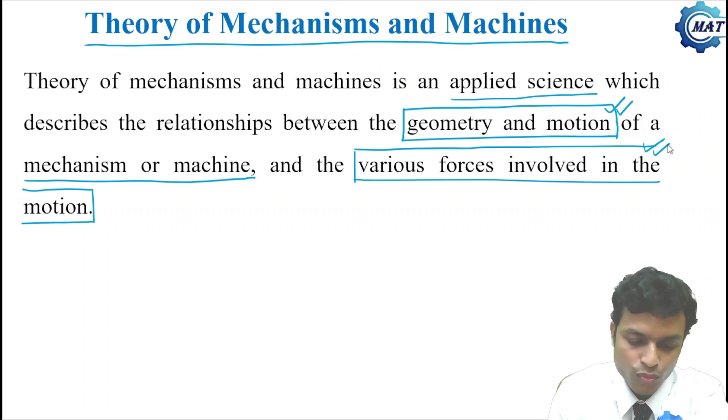So basically, the subject defines the motion of a mechanism or machine in two aspects. First, it describes the motion as a function of geometry only, and in the second stage, it describes the various forces involved in the motion. So based on this, the subject can be divided into two groups: number one, kinematics,

and number two is kinetics. In kinematics, the motion of a machine or mechanism is a function of geometry only, and we do not consider the forces. That doesn't mean forces are absent — without force, motion is impossible. But here we do not consider the forces, as forces are hidden in the first stage, that is kinematics.

In the second stage, that is kinetics, we consider the forces, and this subject defines the various forces involved in the motion. So this subject is broadly divided into two groups, kinematics and kinetics.

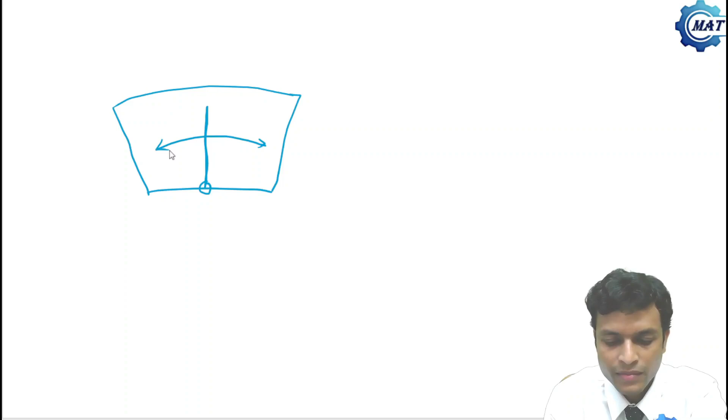Let me explain this with the help of an example. Let us consider a windshield wiper mechanism of an automobile — this is the windshield and this is the wiper blade. To design the wiper mechanism, the designer first has to confirm that this blade can cover the desired area or not, and that depends purely on the geometry of the mechanism.

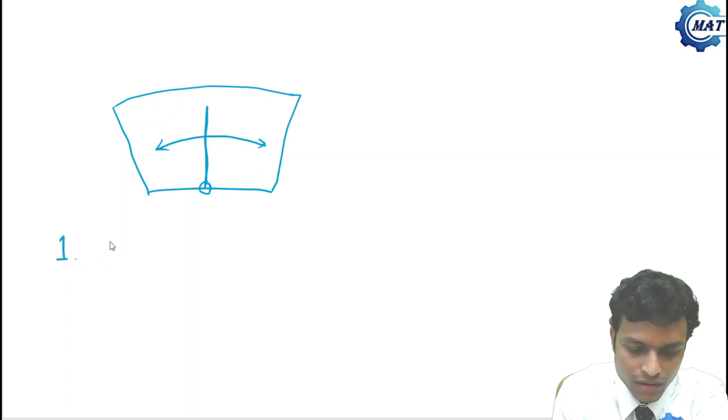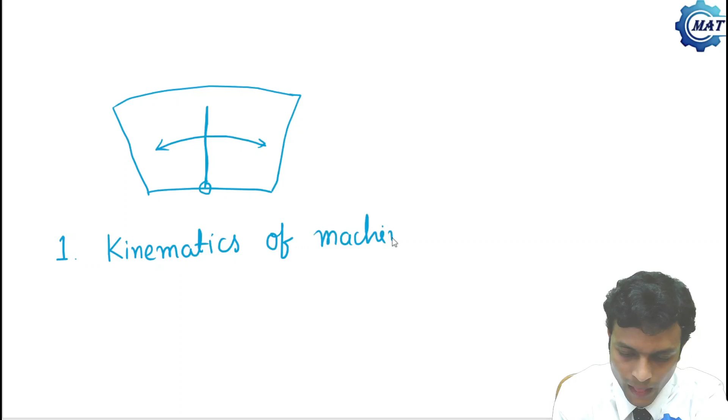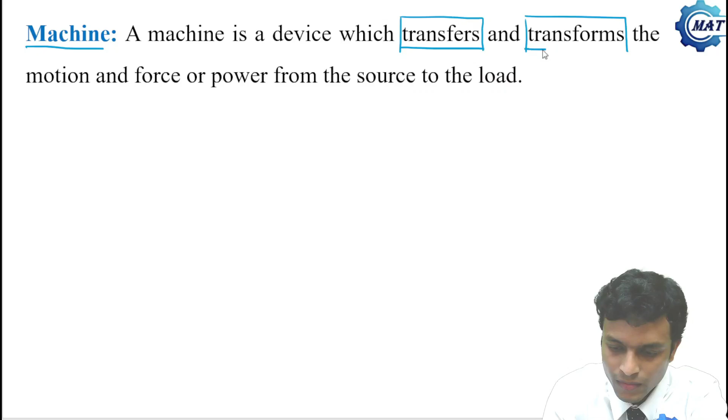Now let us see the definition of a machine. A machine is a device which transfers and transforms the motion and force or power from the source, that is the input, to the load, that is the output.

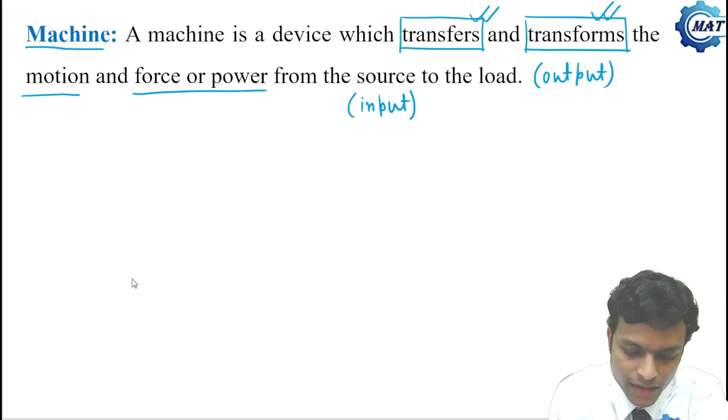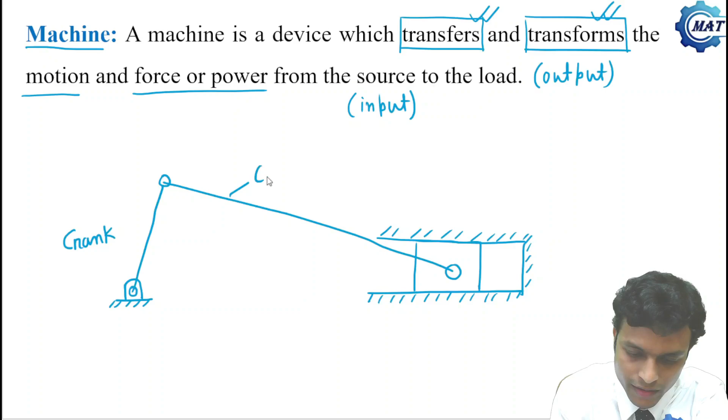Let me explain this with an example. This is an IC engine, where this is the crank, this is the connecting rod, this is the piston, and this is the cylinder. As input, or source, gas force is available at the piston.

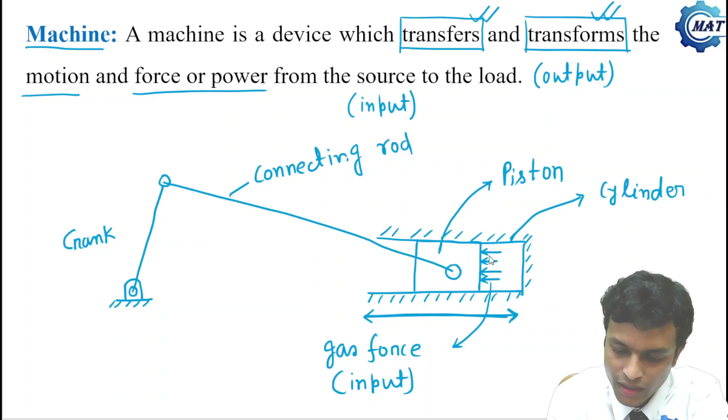And the motion of the piston is to-and-fro rectilinear oscillation. This motion is transferred to the crank by this IC engine, which is a machine. So this machine transfers the input motion available at the piston to the crank, which is the output, and the motion of the crank is continuous rotation. So this engine transfers the motion from the piston, the input, to the crank, the output. Not only that, it also transforms the motion from to-and-fro rectilinear oscillation to continuous rotation.

So a machine does two things: it transfers and transforms the motion and force or power from the source, the input — gas force here — to the load, the output. A load is present at the crank for the IC engine. We also have to note that input is available to us, whereas output is desirable to us. So the continuous rotation is what is desired.

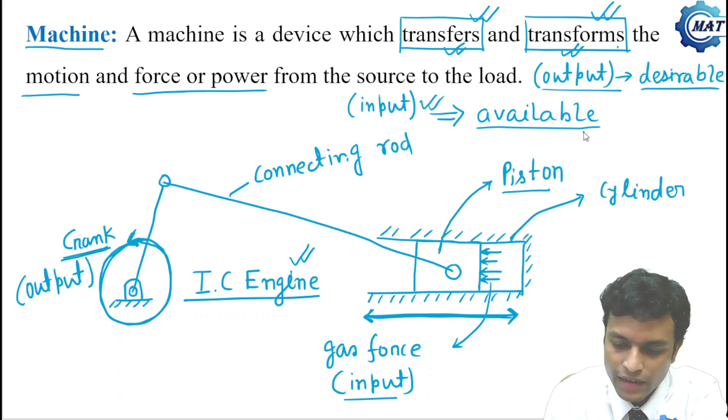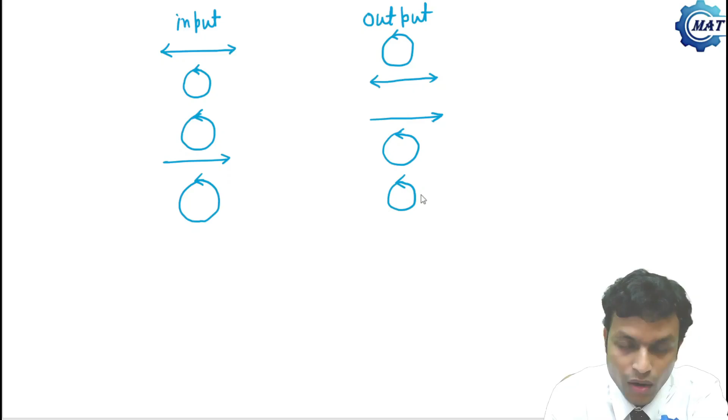Now we have seen that input in the IC engine is to-and-fro rectilinear oscillation, whereas output is continuous rotation. There are various combinations between input and output. The vice versa is also possible — input continuous rotation, output to-and-fro rectilinear oscillation. Input continuous rotation, output unidirectional rectilinear motion, and the vice versa of this is also possible, from unidirectional rectilinear motion to continuous rotation. Also continuous rotation at different speeds — input continuous rotation, output also continuous rotation, but at different speeds.

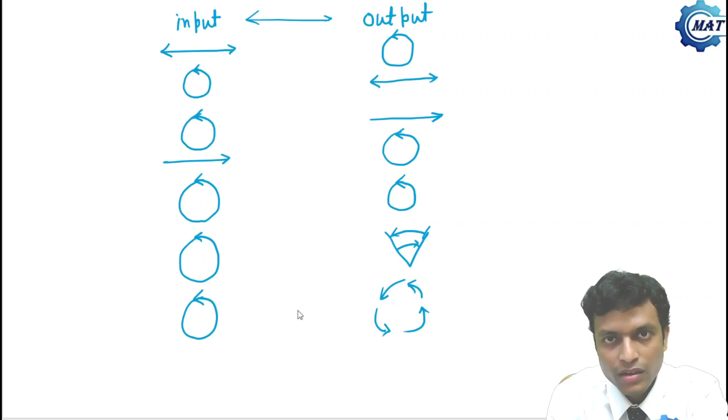From continuous rotation to angular oscillation, and vice versa of this is also possible, from continuous rotation to intermittent rotation. So these are various combinations between input and output motion — this is the transformation of motion. A machine transfers and transforms the motion and force or power from the input to the output, and these are examples of various combinations between input and output motion.

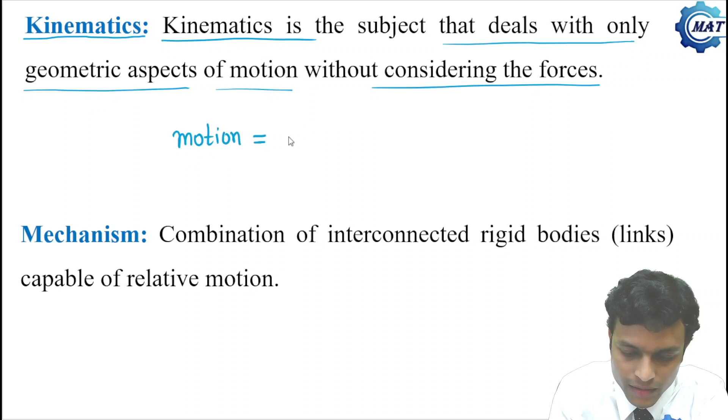Now let us see what kinematics is. Kinematics is the subject that deals with only the geometric aspect of motion without considering the forces. So in kinematics, forces are not considered — the motion is defined as a function of geometry only.

And in kinematics, a machine is referred to as a mechanism. In the study of kinematics, a machine is called a mechanism. So when we study kinematics, we call a machine a mechanism.

Now let me give you the technical definition of mechanism. Mechanism is a combination of interconnected rigid bodies, which are technically called links, capable of relative motion. So this is the combination of interconnected rigid bodies. This term has importance in mechanism.

We know that a machine is called a mechanism when we study kinematics, and kinematics means the geometric aspect of motion. So these links must be rigid in kinematics. Why? Because forces are present. When a machine is in running condition, various forces are present there. That force will deform the links if they are not rigid. If they are not rigid, that force causes deformation of the links. Then the geometric value or geometric form of the links will be changed, or geometric values will be lost. So geometric analysis will no more be valid there. So links must be rigid when we study kinematics. Otherwise, geometric study will be invalid.

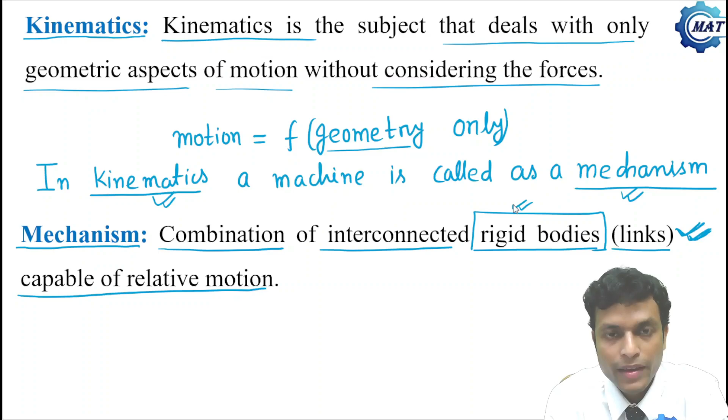Now let us come to one very important point, that is kinematic pair. We know that mechanisms are combinations of interconnected rigid bodies. The rigid bodies are called links. Now the interconnections between links of a mechanism are called kinematic pairs. So the interconnections are called kinematic pairs.

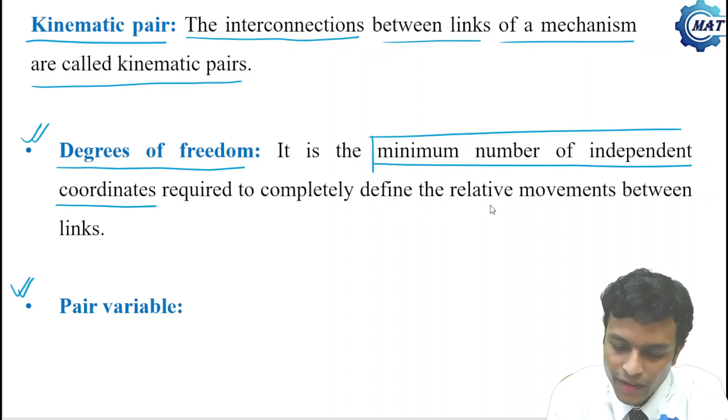Now before going to detailed study, please note two important terms: degrees of freedom and pair variables. Degrees of freedom is the minimum number of independent coordinates required to completely define the relative movements between links, called degrees of freedom of a kinematic pair. We know that a kinematic pair connects various links, and the minimum number of independent coordinates required to define the relative movement between links is called degrees of freedom of that kinematic pair.

And the independent coordinates are called pair variables. So pair variables are the independent coordinates. The independent coordinates are called pair variable.

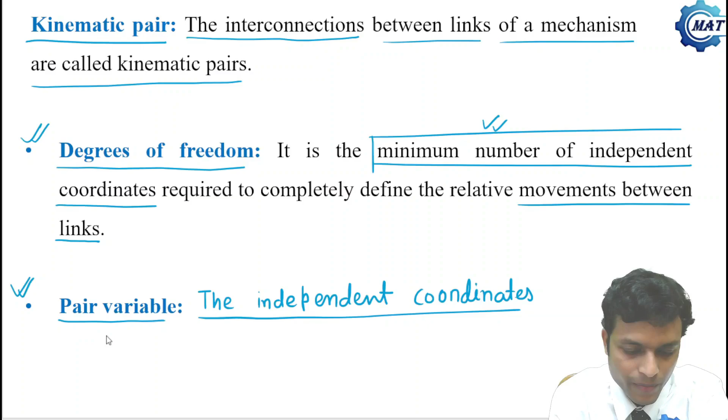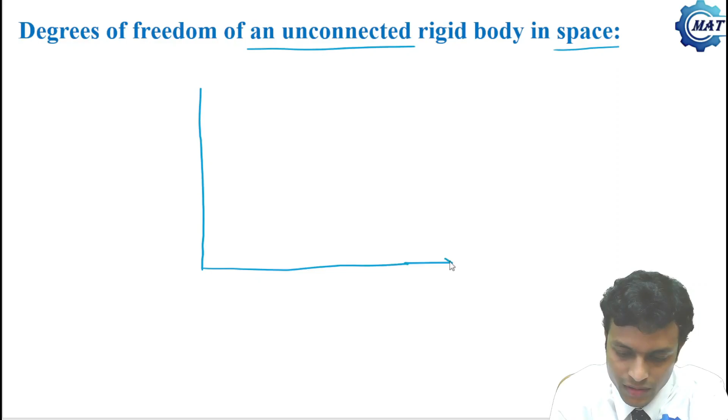Now let us see what is degrees of freedom of an unconnected rigid body in space. So let me draw one Cartesian coordinate system in space. This is a three-dimensional Cartesian coordinate system in space, with coordinates x, y and z.

An unconnected rigid body can translate along the x direction by an amount delta x. It can also translate along the y direction by an amount delta y. It can also translate along the z direction by an amount delta z. It can rotate about the x-axis by an amount delta alpha. It can rotate about the y-axis by an amount delta beta, and it can also rotate about the z-axis by an amount delta gamma.

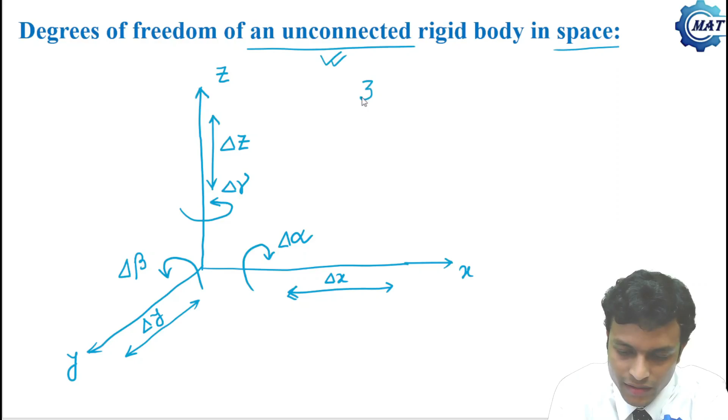So there are 6 motions available for an unconnected rigid body in space: 3 translations, which are delta x, delta y, delta z, and 3 rotations, which are delta alpha, delta beta, and delta gamma.

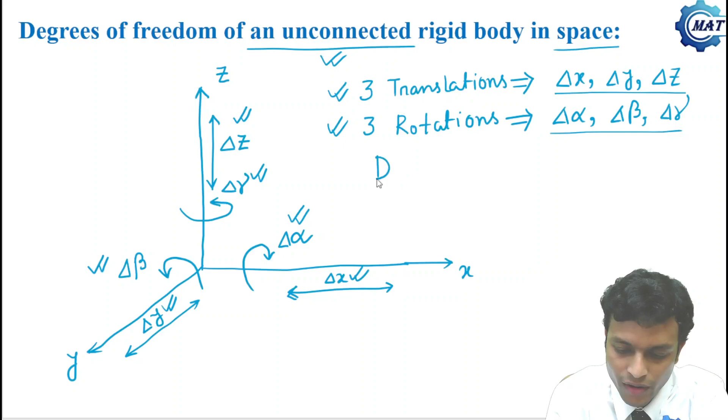Now these 6 independent coordinates, that is 3 translations and 3 rotations, all these 6 coordinates are independent of each other. Why are they independent? Because we can give any amount of delta x, any amount of delta y, any amount of delta z, and similarly any amount of delta alpha, delta beta, and delta gamma. So all these 6 coordinates are independent, as we can give any value to each coordinate. So 6 independent coordinates are required to completely specify the relative motion of an unconnected rigid body in space. So the degrees of freedom of an unconnected rigid body in space is 6.

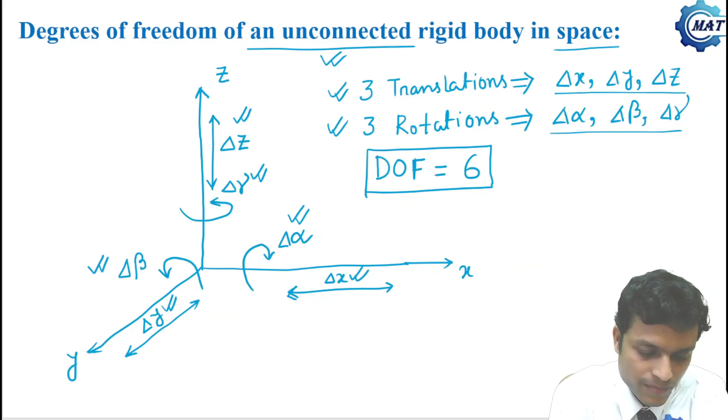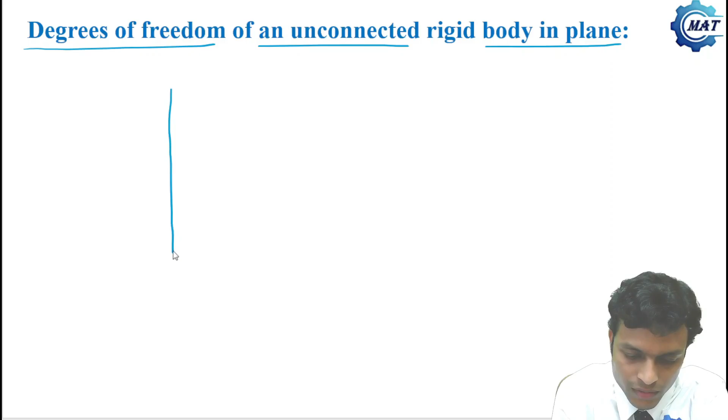Now let us see what is the degrees of freedom of an unconnected rigid body in plane motion. We have discussed for space, now for plane. So let us define that. Let us consider the xy plane, this is x, this is y.

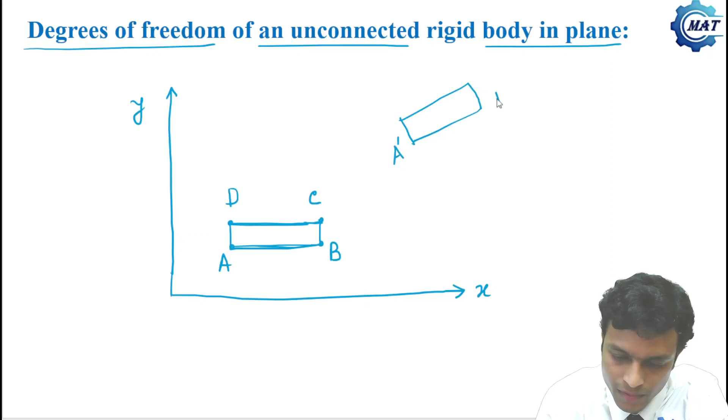And this is a rectangular rigid body, an unconnected or free rigid body, that is A, B, C, D. This is one instant where the orientation of ABCD is like that. And in the second instant, the orientation becomes like this: A prime, B prime, C prime, D prime.

Now let us first locate or define the position of B prime from B. That is, the x translation of point B is delta x and y translation of point B is delta y. So by these two independent coordinates, motion of point B can be completely defined. But that doesn't ensure the relative motion of the entire rigid body.

Why? Because we have located point B prime, but there may be a rotation of this face AB by an amount delta theta. So now if we define these three, that is delta x, delta y and delta theta, for any face AB, then the orientation of the entire rigid body has been completely defined. So three independent coordinates are required to completely specify the relative motion of the rigid body, and they are two translations, delta x and delta y, and one rotation, delta theta.

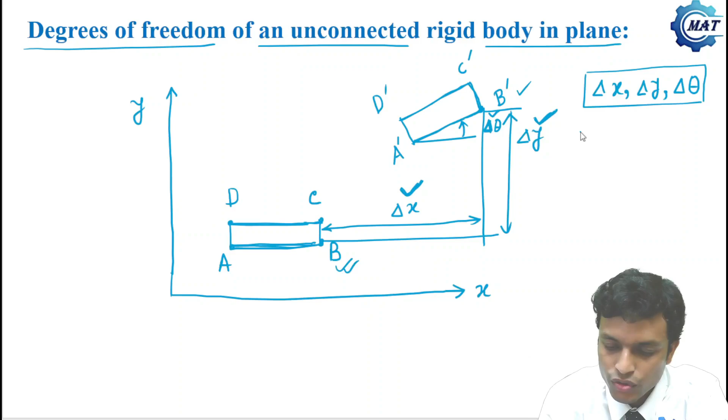And here we can give any amount of delta x, any amount of delta y and any amount of delta theta. So each of them are independent to each other. So degrees of freedom of an unconnected rigid body in plane motion is 3.

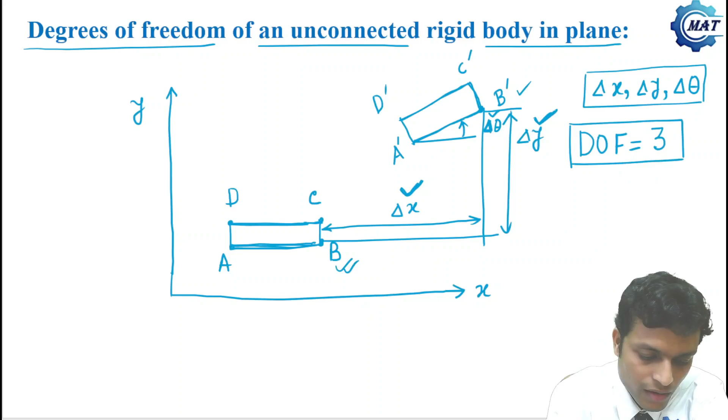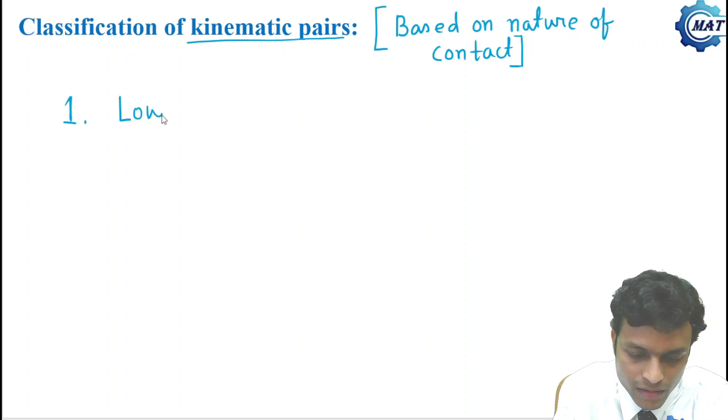Now let us classify the kinematic pairs, first based on nature of contact. Kinematic pairs connect different links, and based on the contact between links, we can classify kinematic pairs under three headings: number one, lower pair; number two, higher pair; and number three, wrapping pair.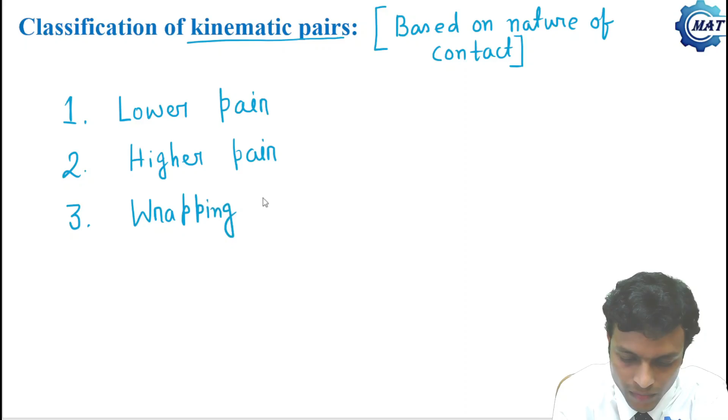In lower pair, the links are connected through their surface contact. In higher pair, links are connected through their line or point contact. In wrapping pair, one body is completely wrapped around another. So in lower pair, there is surface contact between links. In higher pair, contact is made through line or point contact. And in wrapping pair, one body is completely wrapped around another.

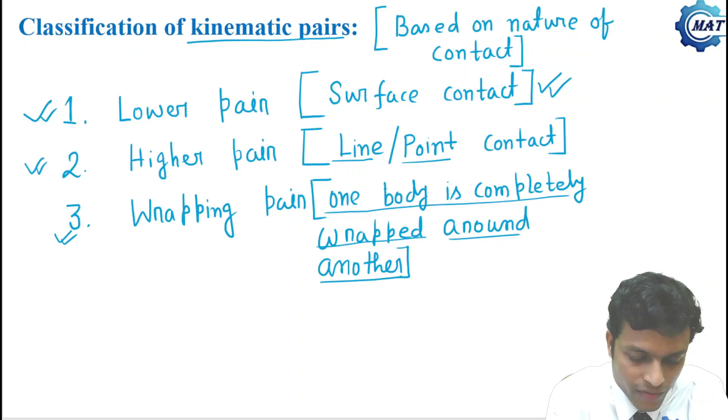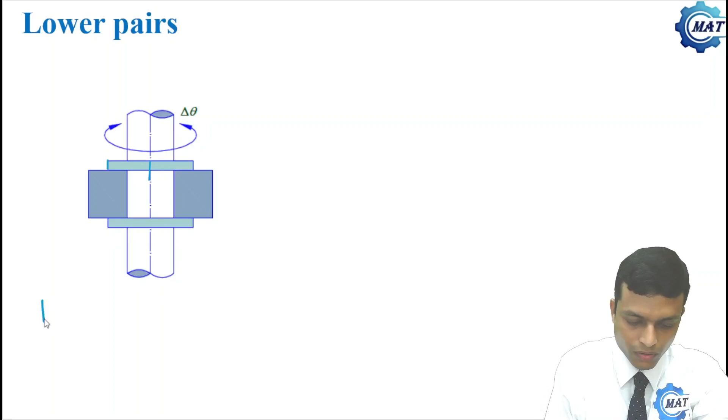Now let me explain the various kinds of lower pair first. This is the first kinematic lower pair, which is called revolute or turning pair. This is body 1 and this is body 2.

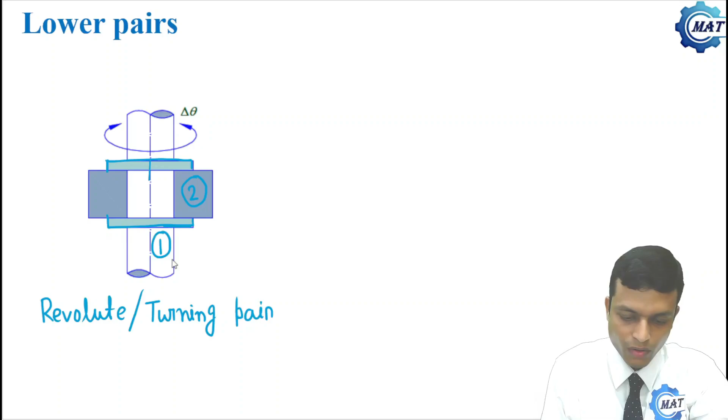Body 1 is a cylindrical rod and in body 2 a cylindrical hole of the same diameter as body 1 is made, and in addition two collars are made on body 1. These collars are an integrated part of body 1.

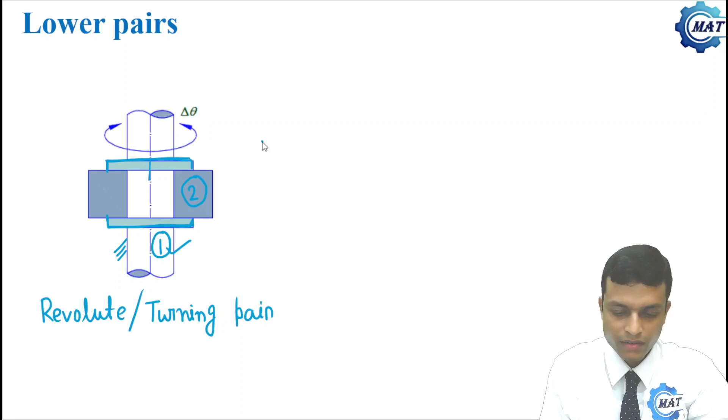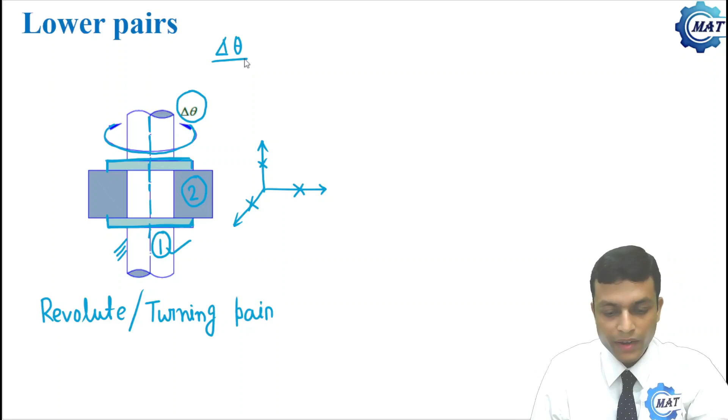Now if we fix body 1, then all translation motion of body 2 has been restricted. That is, body 2 cannot translate along x, cannot translate along y, and cannot translate along z. Three translatory motions of body 2 have been restricted. Body 2 can only rotate about the axis of body 1, and this rotation can be defined by delta theta.

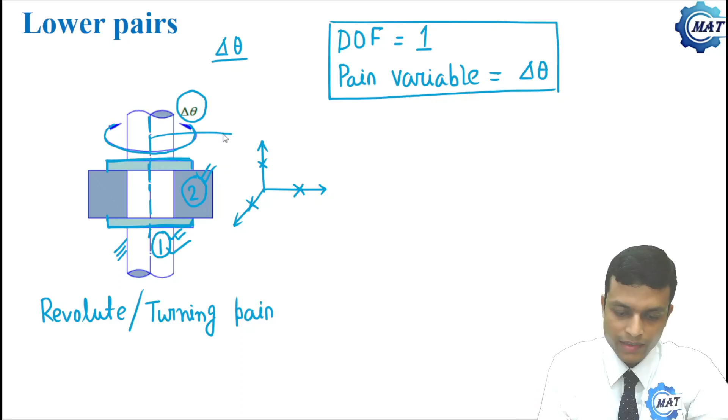So only one rotation can completely define the relative movement between body 1 and body 2. So degrees of freedom is 1 for the revolute or turning pair, and the pair variable is delta theta. This axis of body 1 is also called the axis of the revolute pair.

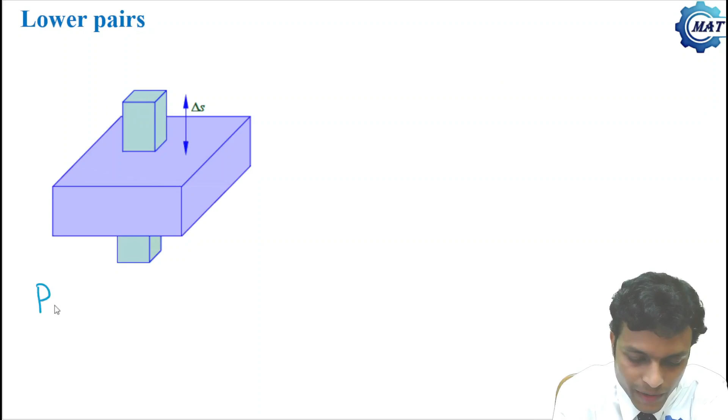The second kinematic lower pair is the prismatic pair. This is body 1 and this is body 2. Body 1 is a rectangular bar, and on body 2 the same size rectangular slot is made.

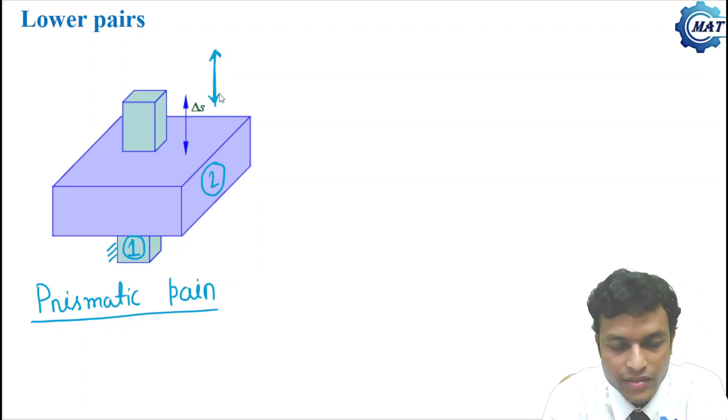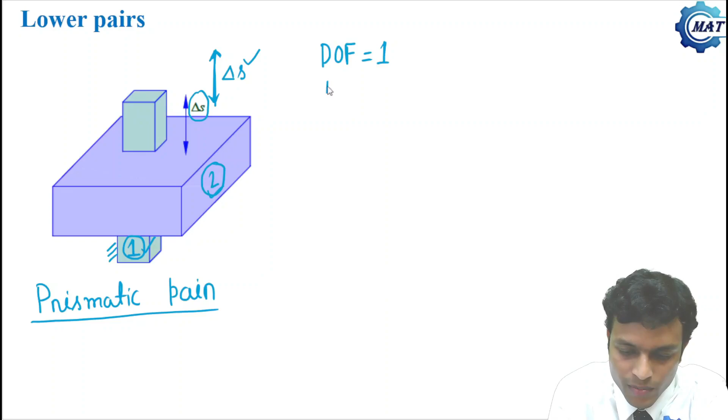In this combination, if we fix body 1, then body 2 can only translate along the slot. All other motion of body 2 has been restricted, and this motion can be defined by a single coordinate, delta s. So by this single independent coordinate, the motion between 1 and 2 can be described. So degrees of freedom of the prismatic pair is also 1, and the pair variable is delta s.

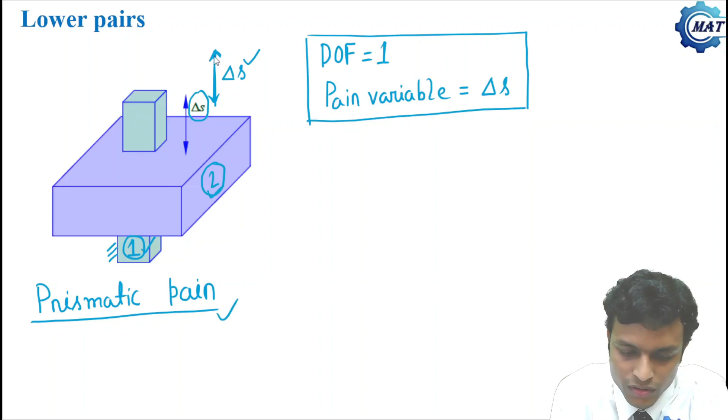So the prismatic pair only allows translation along the slot. This is a model of the prismatic kinematic pair. This is body 1 and this is body 2. On body 1 there is a rectangular slot, and body 2 is a rectangular bar only. Now if we hold body 1 fixed, body 2 can...

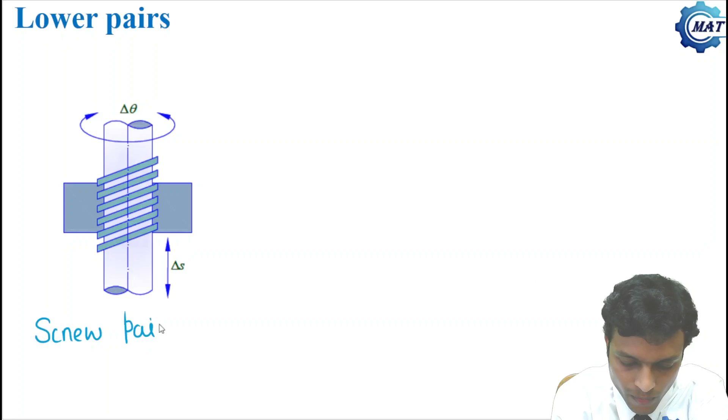The third kinematic lower pair is the screw pair, where body 1 is a screw and body 2 is nothing but a nut. Body 2 is the nut and body 1 is the screw, and on body 1 helical threads are made.

In a screw-nut pair, if we fix the screw, the nut can rotate as well as translate along this direction. So two motions are available for the nut: one translation delta s and one rotation by an amount delta theta. But these two coordinates, delta theta and delta s, are not independent to each other.

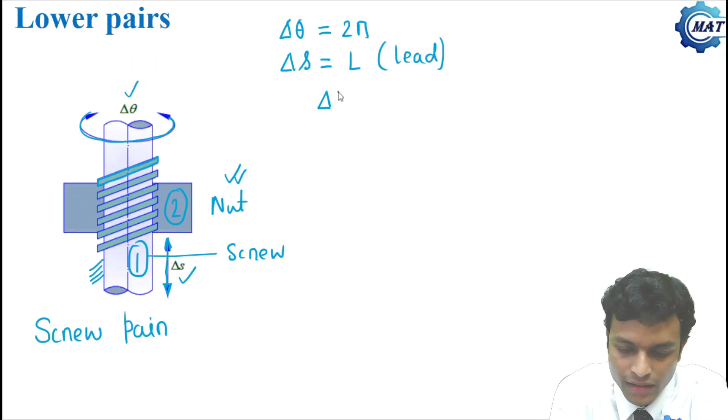Why? Because if we make delta theta equal to 2 pi, delta s will always be L, that is the lead of the screw. So we can develop a relationship between delta theta and delta s, that is delta theta by delta s equals 2 pi by L. So they are related to each other, they are not independent to each other.

We cannot give any amount of delta s and any amount of delta theta independently. For a particular value of delta theta, delta s will be fixed by this relationship. So only one independent coordinate, delta theta or delta s, can completely specify the motion between screw and nut. So degrees of freedom of a screw pair is 1, and the pair variable is delta theta or delta s.

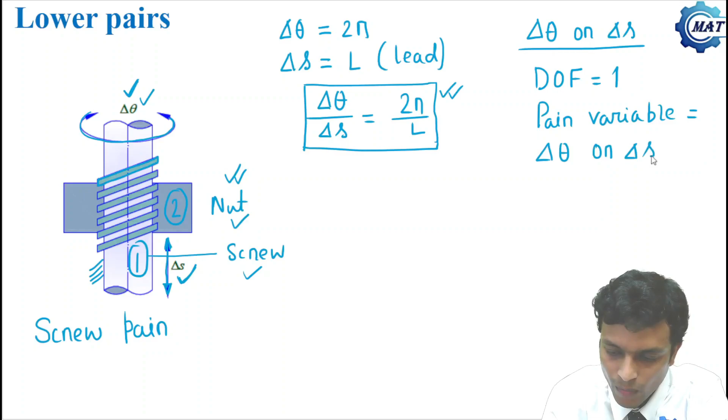This is a screw pair - this is the screw and this is the nut. A blue point is marked on the nut. Now if I fix the screw, the nut can rotate, as well as translate along the screw. For a given amount of rotation, the translation is always fixed. Vice versa, for a given amount of translation, the value of rotation is always fixed. So only one of them, rotation or translation, can define the relative motion between screw and nut.

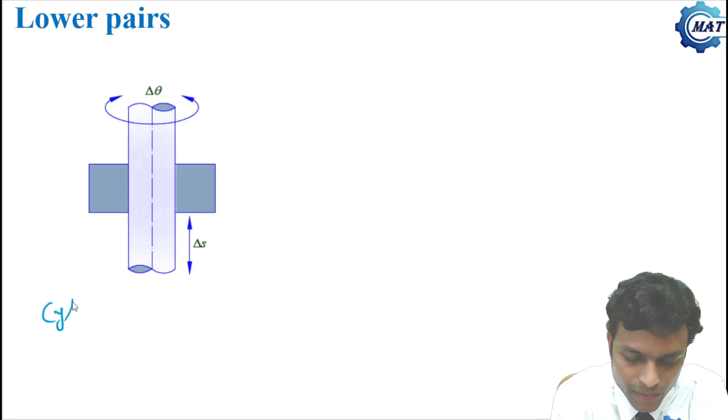The fourth kinematic lower pair is cylindrical pair. Here body 1 is a cylindrical rod and body 2 has a cylindrical hole of the same diameter as body 1. Now if we fix body 1, body 2 can translate along the axis of body 1, as well as rotate about the axis of body 1.

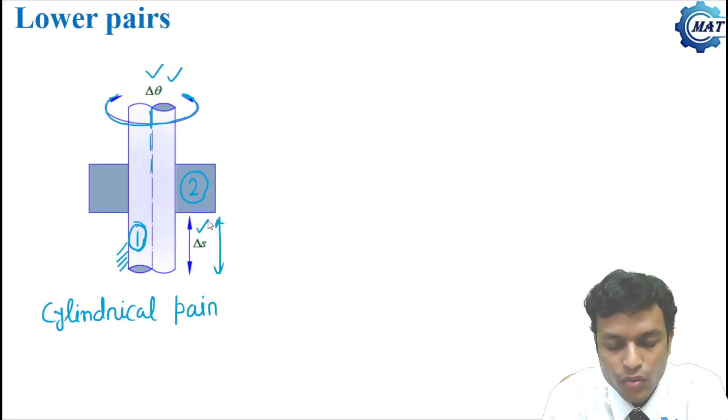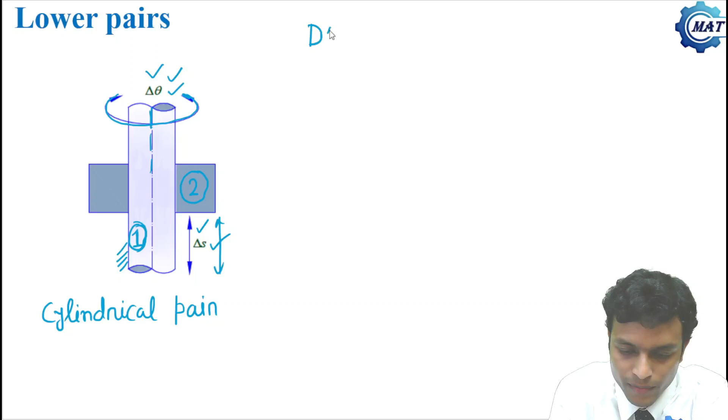So two motions are available for body 2, and delta theta and delta s are independent of each other - they are not related. We can give any amount of delta theta and any amount of delta s. So two independent coordinates are required to completely specify the motion between 1 and 2. Degrees of freedom of cylindrical pair is 2, and the pair variables are delta theta and delta s.

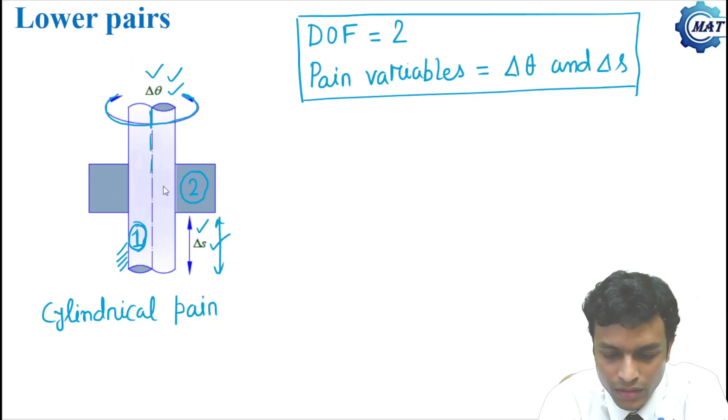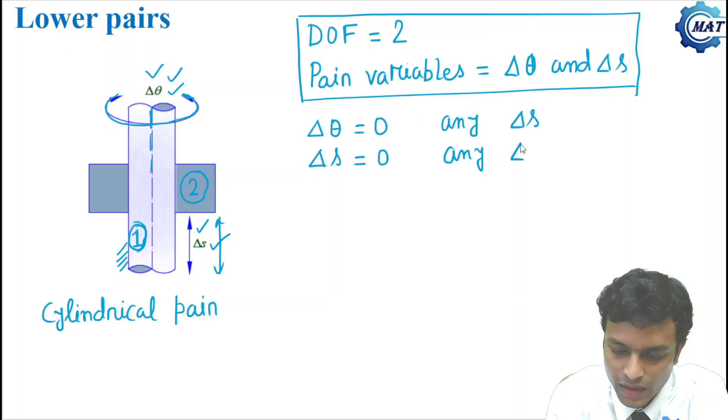They are not related to each other, rather independent. If we fix delta theta at 0, we can give any value of delta s. Similarly, if we fix delta s equal to 0, we can give any value of delta theta. So these two are independent of each other, hence the degrees of freedom is 2. This is a cylindrical pair.

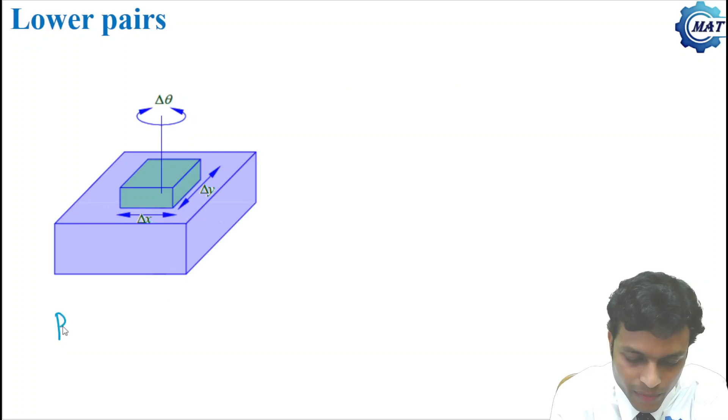The fifth kinematic lower pair is planar pair. This is body 1 and this is body 2. If we fix body 1, body 2 can translate along two mutually perpendicular directions, x and y, by an amount delta x and delta y, and it can also rotate about z - like an unconnected rigid body in a plane. So three independent coordinates, delta x, delta y and delta theta, two translations and one rotation, are allowed in such a pair, and all three are independent of each other.

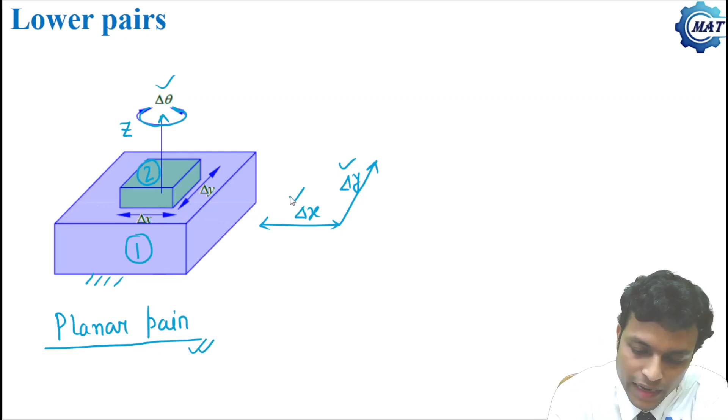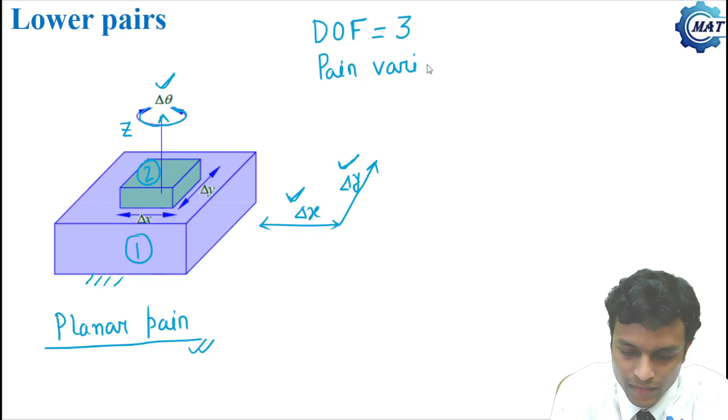We can give any amount of delta x, any amount of delta y and any amount of delta theta. So degrees of freedom of planar pair is 3, and pair variables are delta x, delta y and delta theta. This is a planar pair. The fixed base is body 1 and this is body 2. Body 2 can translate along x direction, translate along y direction, as well as rotate about z. So three motions are available here and all three are independent of each other.

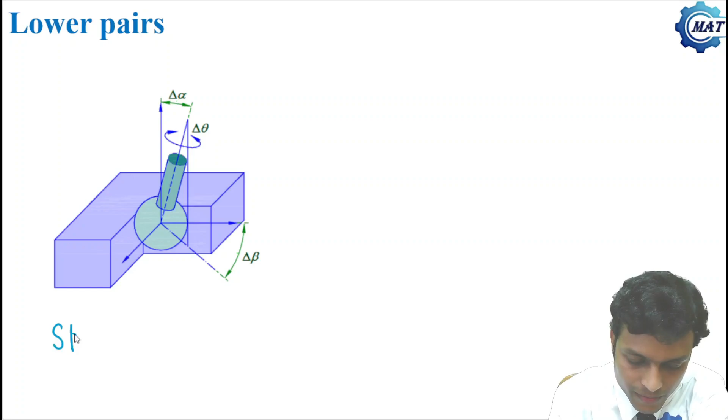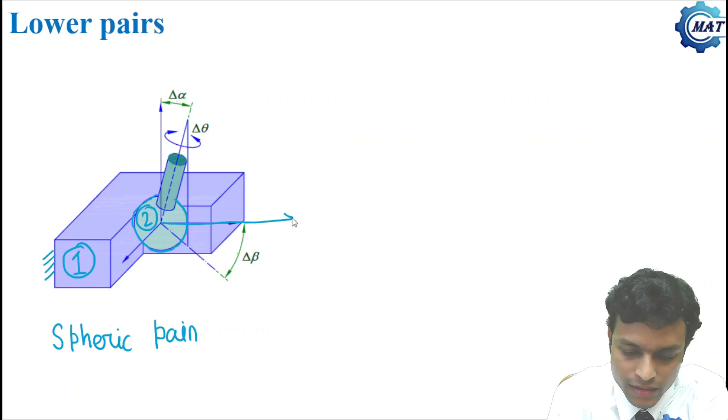The last kinematic lower pair is spheric pair. This is body 1 and this is body 2. On body 2 there is a spherical ball, and on body 1 a spherical cavity of the same size is made, and body 2 is inserted into body 1. Now if we fix body 1, then all translatory motion of body 2 is lost - it cannot translate along x, y, or z. So it has only rotations.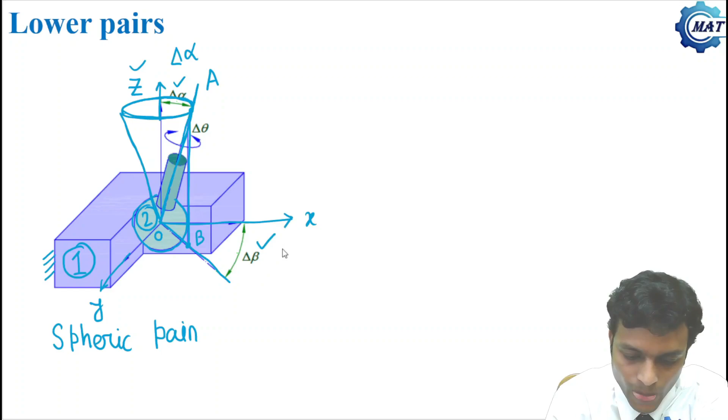What are those rotations? Let us consider this origin as O and the axis of body 2 as OA. Now if we fix the angle between Z and OA by delta alpha, then this axis OA can lie anywhere on the surface of this cone. So the position of OA is not completely defined. To define that, let us project point A onto the xy plane, and call this point B. Now we define the angle between OB and the x-axis as delta beta. By these two, delta alpha and delta beta, the position of OA is now fixed.

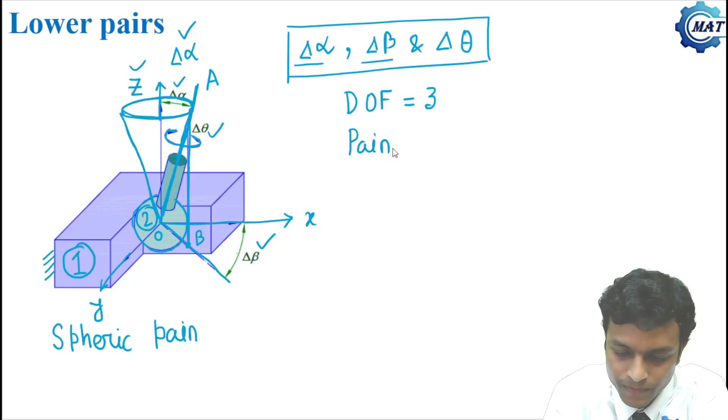But these two are not sufficient to completely specify the motion between 1 and 2. Why? Because this axis OA, axis of body 2, can rotate about its own axis by an amount delta theta. So this rotation has to be considered also. These three rotations can completely specify the relative motion between 1 and 2. So degrees of freedom of a spheric pair is 3, and pair variables are delta alpha, delta beta and delta theta.

Now let me give you the information of all 6 kinematic lower pairs in a single page. For revolute or turning pair, degrees of freedom is 1. Pair variable is delta theta, only rotation is allowed, and symbol is R. For prismatic pair also degrees of freedom is 1. Pair variable delta S, only translation is allowed, and it is denoted by P. For screw pair degrees of freedom is 1, and pair variables are delta theta or delta S, as they are related to each other.

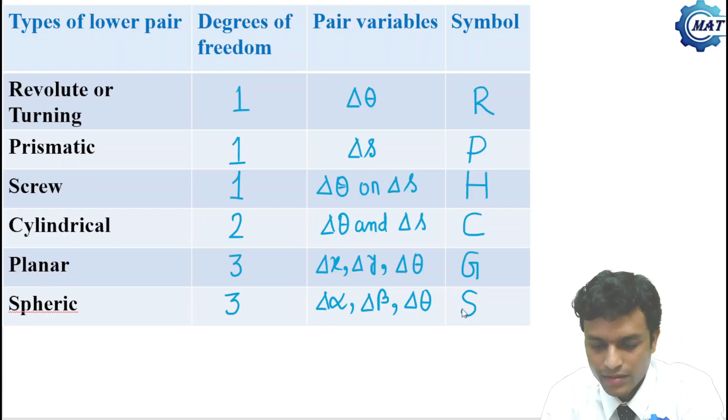And in screw, helix are made there, so it is defined by H. Cylindrical pair degrees of freedom is 2, and pair variables are delta theta and delta S, and it is symbolized by C. Planar pair degrees of freedom is 3, and pair variables are delta x, delta y and delta theta. Planar pair is denoted by G. Spheric pair also has 3 degrees of freedom: delta alpha, delta beta and delta theta. And the symbol of spheric pair is S. So these are about the 6 lower kinematic pairs.

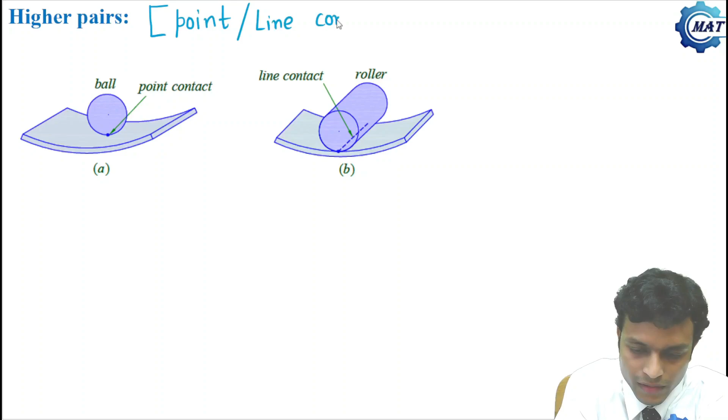Now higher pair we know is when there is point or line contact between links. Examples are ball bearing, roller bearing. In ball bearing there is a point contact between ball and recess. In roller bearing there is a line contact between roller and recess.

Now what is the degrees of freedom of a higher pair? To understand that, I am showing only the half circle of this roller, and we are considering that the recesses are straight, so we draw a half circle. At one instant this is the position of the half roller, and at another instant it is like this. So this pair, if this is a plane motion, allows a translation by amount delta S, and it also allows a rotation by amount delta theta, rotation of this face by an amount delta theta. Only translation along this direction, that is delta y, is restricted.

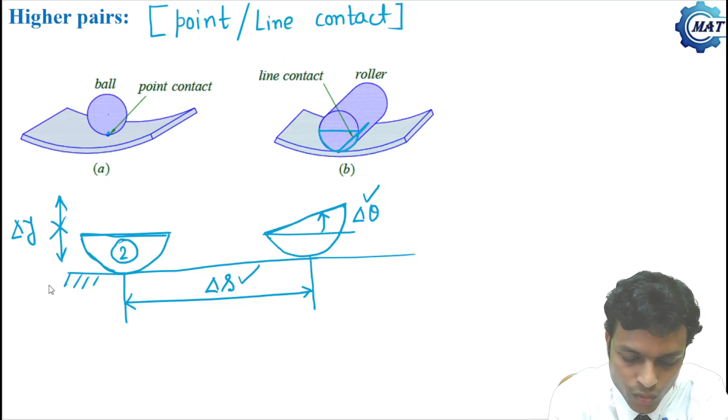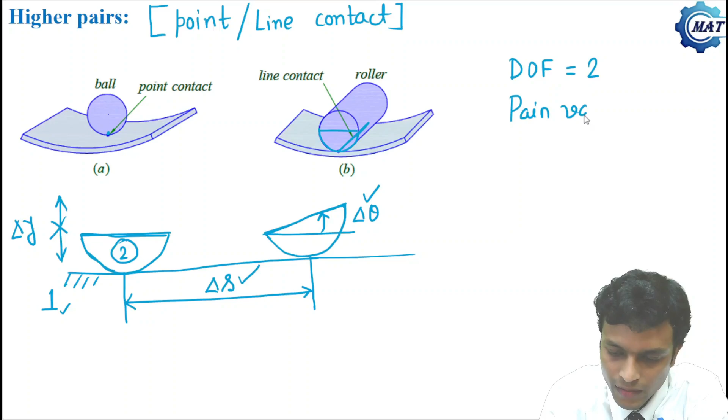So two independent coordinates, that is delta S and delta theta, can completely specify the motion between 1 and 2. If roller is 2 and the fixed surface, the recess, is 1, then two independent coordinates can completely specify the motion between 1 and 2. So degrees of freedom of a higher pair is 2, and pair variables are delta S and delta theta.

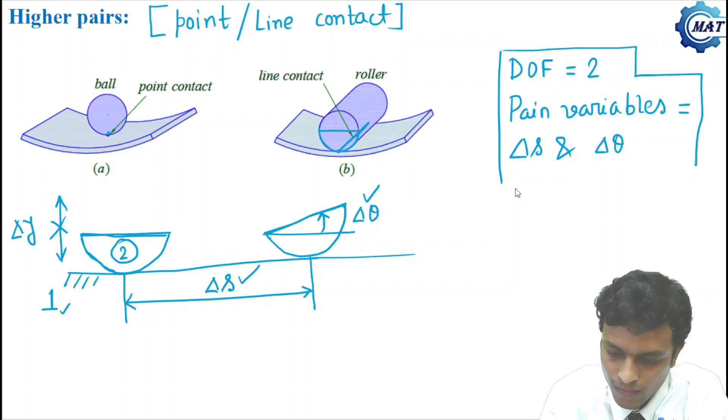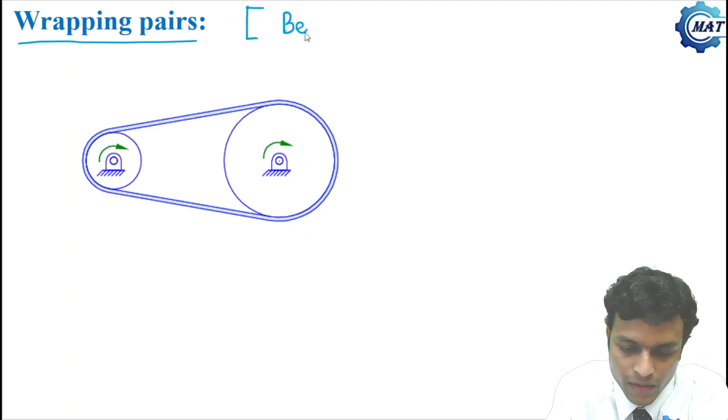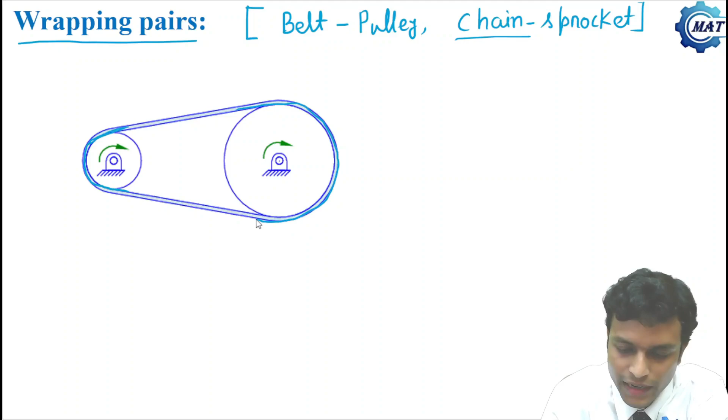Next is wrapping pair. We know that this is when one body is completely wrapped around another. The examples are belt pulley and chain sprocket. In belt pulley, the belt is completely wrapped around the pulley. Similarly, for chain sprocket, the chain is completely wrapped around the sprocket. So this kind of kinematic pair is called a wrapping pair.

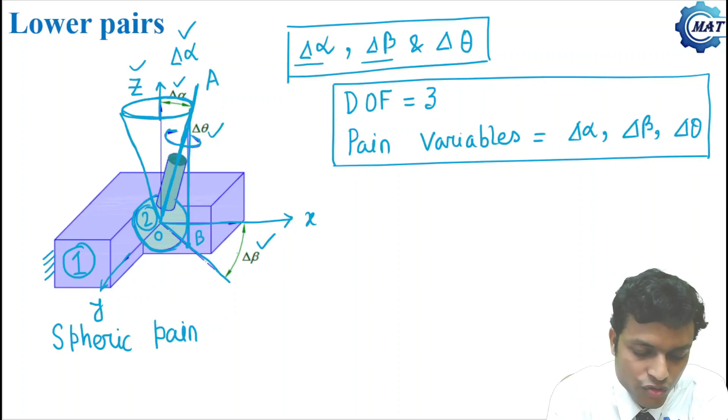In force closed pair, the contact is maintained by external forces. When contact is maintained by external forces, that is called a force closed pair. The spheric pair which I showed you earlier—if I repeat that, the construction of such kind of spheric pair is not possible, because we cannot insert this sphere into the spherical cavity. The actual construction of a spheric pair is like this.

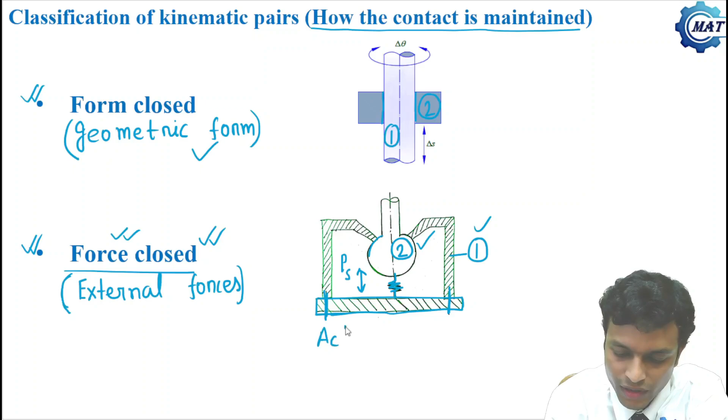This is body 2 and the other part is body 1, and here body 1 is made of parts. This is one part and the remaining is the other part, which are connected here, and between 1 and 2 there is a spring. So contact between 1 and 2 here is maintained by the spring force PS, and such kind of kinematic pairs are called force closed pair. So this is the actual construction of a spheric pair.